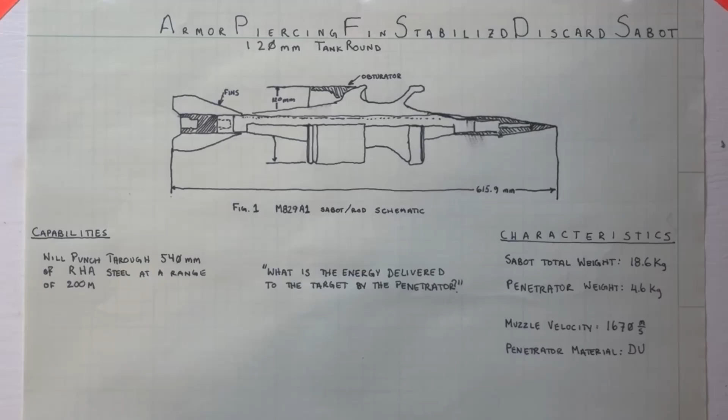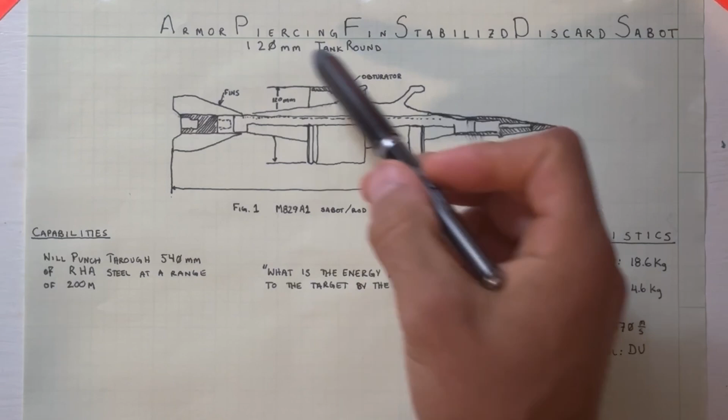I am going to be explaining to you guys the characteristics, capabilities, and general information about the armor-piercing, fin-stabilized discarding sabot round, otherwise known as APFSDS. It's a 120 millimeter tank round, first fielded by the U.S. Army, and it's now being used by our partner nations as an anti-armor round.

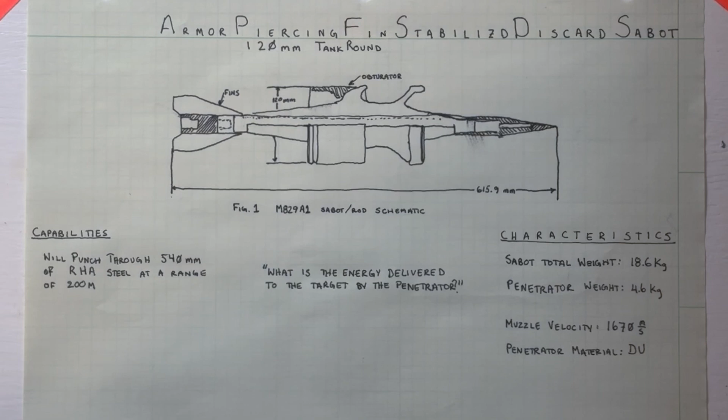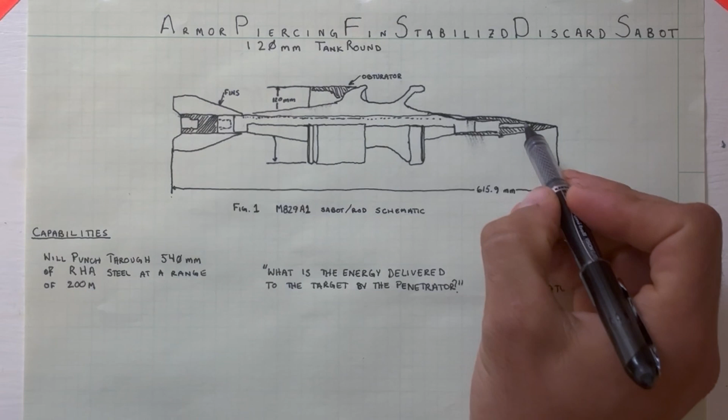So this is a basic schematic. It's a 120 millimeter tank round with a subcaliber penetrator, meaning the penetrator is not the width of the barrel. The penetrator, the thing that actually hits the target, is this long, thin thing in the middle of this drawing, not all this chunky, weird-looking stuff on the outside.

The chunky, weird-looking stuff on the outside is aluminum, and it is what actually seals the barrel so that the gases from the tank gun can push the round forward. That is accomplished by something called an obturator, which engages with the rifling and makes the round spin. But it's also stabilized by its fins.

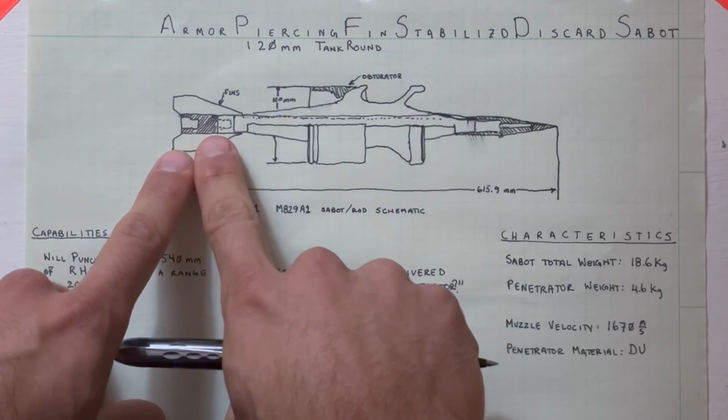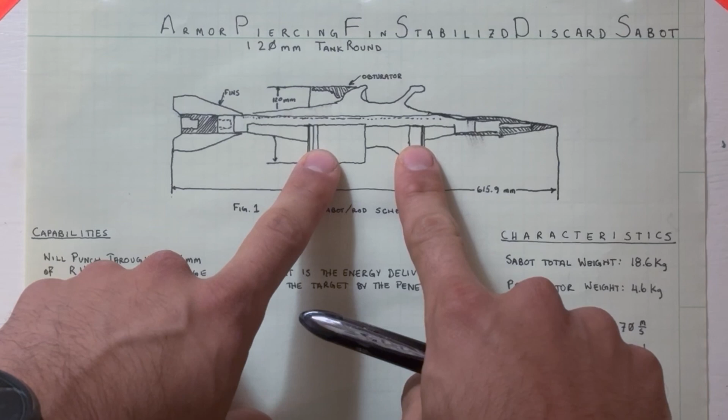So its fins stay on. This is integral to the penetrator. The aluminum sabot is actually what is discarded, all this stuff here. It engages with the rifling, the round leaves the barrel, and then all of this aluminum sheds away, and then you're just left with the penetrator going very, very fast.

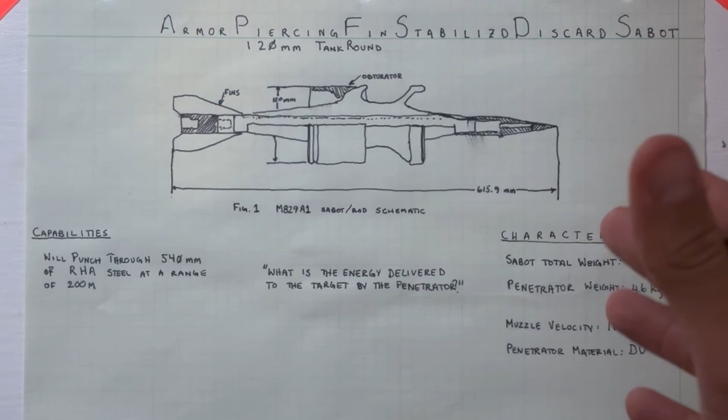The penetrator is also very dense. It's made out of depleted uranium, which is a byproduct of enriched uranium, used for weapons and for nuclear power. When it's depleted, it's just extremely heavy and dense, and it's used in applications where something dense is needed. It's mildly radioactive, so the target tank, after being hit with this round, will be mildly radioactive because the depleted uranium goes everywhere.

So let's talk about some characteristics, then we'll talk about some capabilities, and then I'll show a video of what it looks like when this thing is in action.

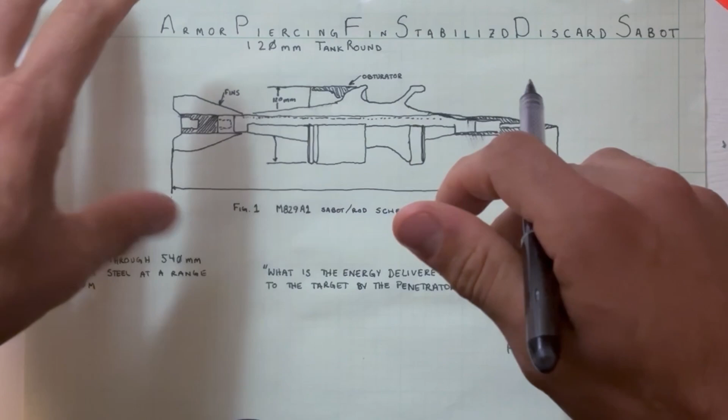Characteristics: total weight of the whole sabot is 18.6 kilos, about 40 pounds. It's a big old thing. That includes the tank round that goes on the back of this with a bunch of propellant and a steel case. So this is actually what goes down the barrel, but this stays in the chamber after it expels it. So the total weight of all that stuff is 18.6 kilograms.

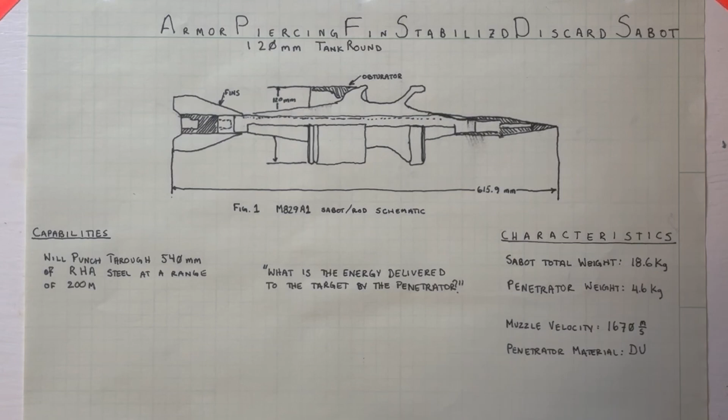The total weight of the penetrator, just the heavy thing that actually hits the tank, is 4.6 kilos. The muzzle velocity, how fast it's going when it leaves the barrel of the tank, is 1,670 meters per second, which is a very large number. For context, your car moves at about 1,609 meters per minute when driving 60 miles an hour, so this is the same but meters per second — about 60 times faster than highway speed.

And like I said before, the penetrator is made out of DU, or depleted uranium.

Capabilities: this will go through 540 millimeters, a little less than 2 feet, of rolled homogeneous armor, basically standard tank armor, at a range of 2,000 meters. From 2 kilometers away, it'll go through 2 feet of steel. So it's a very, very powerful weapon.

I'm going to show you some slow motion video of this being used, and then we can talk about it.

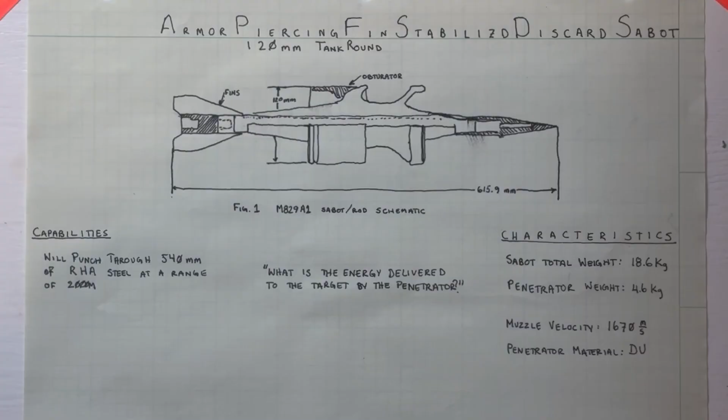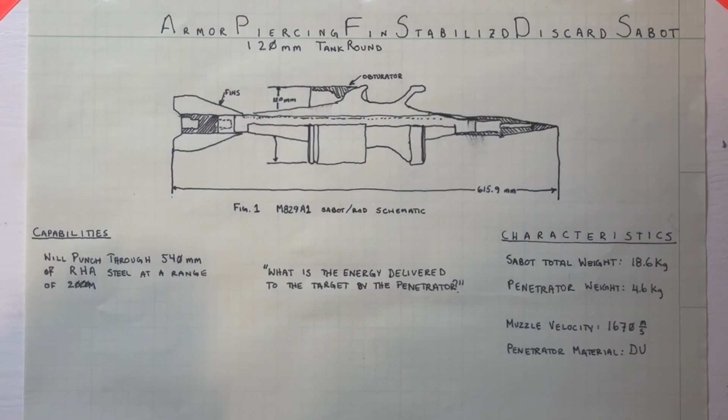We'll do some quick math as to what the energy delivered to the target by the penetrator is, and then that's it. This is a kinetic weapon, meaning the only energy that the round has when it hits the target is kinetic from motion.

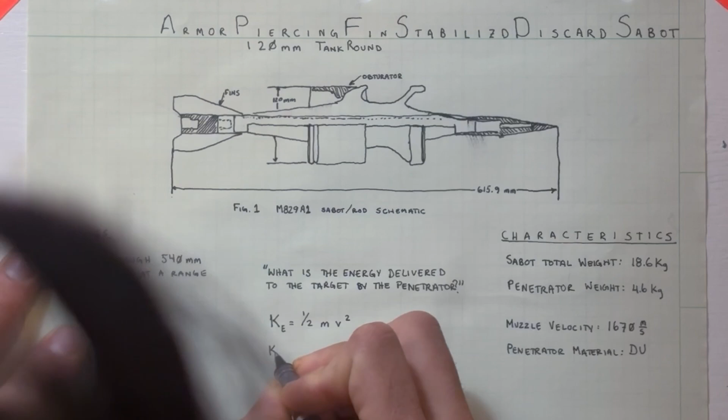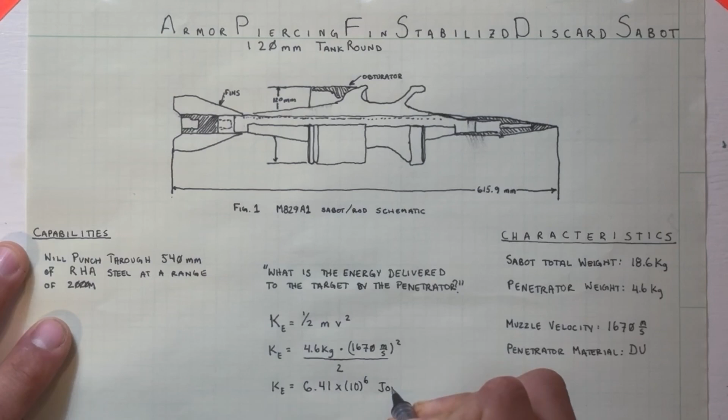The equation, if you remember physics 1, is KE equals one half mv squared. So KE equals 4.6 kilograms, the weight of the penetrator, times 1670 meters per second, the velocity, squared, divided by 2. 1670 squared is a big number, 4.6 is a regular size number, and 2 is a regular size number, so you get a very large kinetic energy. It works out to 6.41 times 10 to the 6th joules, which is a phenomenally large number.

Barring any questions, this is a 120 millimeter APFSDS tank round. Thank you for your time and attention.